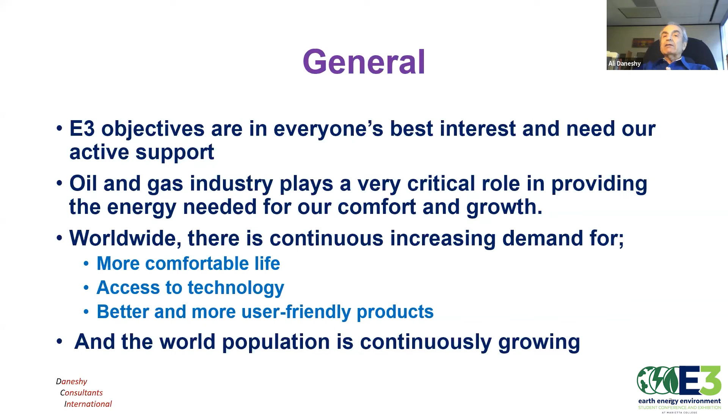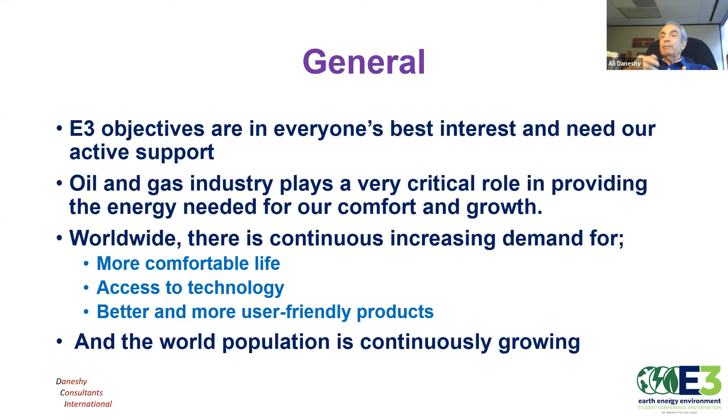The oil and gas industry plays a very critical role in providing the energy needed for our comfort and growth. Worldwide, there is a continuously increasing demand by all the people in this world for a more comfortable life. We like to have access to technology, and we want better and more user-friendly products. Also keep in mind that in addition to these increasing demands for a better life, the world population is also increasing, which means the volume of demand is gradually increasing.

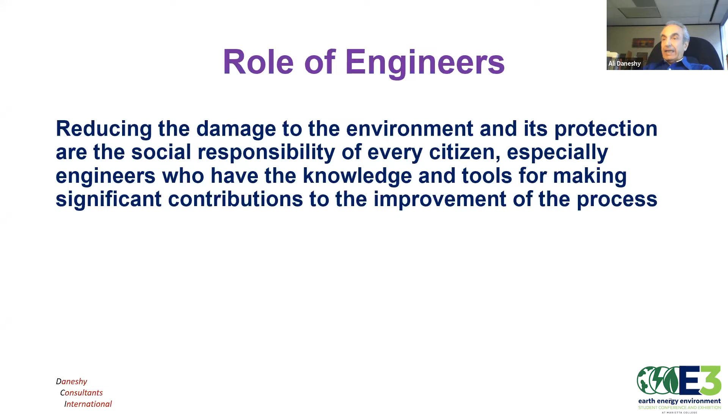Now, let's look at the role of engineers. Reducing the damage to the environment and its protection are the social responsibility of every citizen, especially engineers, because we have the knowledge and tools for making significant contributions to the improvement and protection of life and the environment. So as engineers, we have an added responsibility to be protective of the environment and contribute to its improvement.

So let's look at the role of oil and gas for world energy supply. Worldwide, our daily consumption of oil is around 100 million barrels per day. Some of the main applications of oil and gas, you all know this, but it's good to review quickly. Transportation, we all drive cars and they run on gasoline. Heating, electricity generation, farming applications, road construction, development of chemicals, plastics, synthetic materials. We use oil and gas, hydrocarbon materials, for all of these different purposes.

Now, together with the positive benefits, we also have some negative side effects. Consumption of oil and gas has these negative side effects: air pollution, you all know about that. Water pollution, climate change, everybody's talking about climate change and heating, thermal pollution, which is again heating of the environment and everything getting warmer, and solid waste generated as a result of our oil and gas production operations.

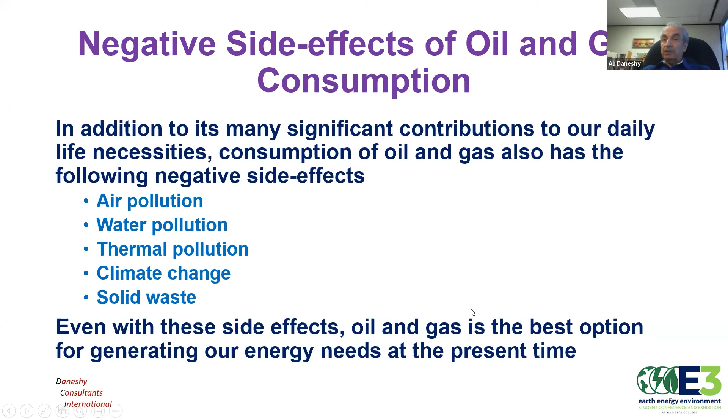So what is our way forward? Given our strong need for consumption of oil and gas, what is our best strategy to minimize the negative side effects of oil and gas production without making onerous changes in our daily lives? The answer to that is technology. Using technology, we need to focus on development of more efficient tools and techniques for production and consumption of oil and gas. Essentially, our savior for the future is going to be technology, its development and its application.

More efficient oil and gas production will contribute substantially to improvement of the environment. The oil and gas industry must continuously strive to improve the efficiency of its production techniques and the processes that we use for its production. Some of the very effective recent technologies for increasing the efficiency of oil and gas production are the ones that you all are familiar with, but I'll just go over them very quickly.

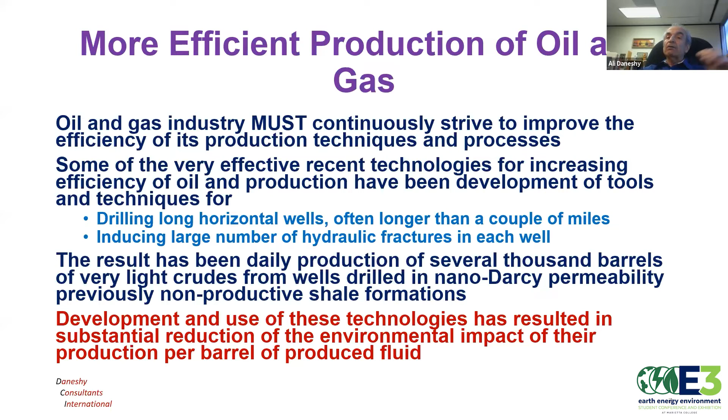Drilling long horizontal wells, often more than a couple of miles long, inducing a large number of hydraulic fractures in each well, as I will describe to you in just a minute. The result has been daily production of several thousand barrels of very light crude from drilled wells in nano-Darcy permeability formations, which were previously non-productive. These are in shale formations that were previously non-productive. Development and use of these technologies has resulted in substantial reduction of the environmental impact of their production per barrel of produced fluid. Let's get into this a little bit more.

US daily oil production is around 7.4 million barrels. A vertical well drilled and fractured in these formations would have produced just a few tens of barrels of oil each day. And many of these vertical wells needed to be drilled to the depth of 10,000 feet. Let's consider, just as engineers, a very quick calculation. If each well is producing something like 30 barrels of oil per day, and we want to produce 7.4 million barrels per day, how many wells do we need to drill? Just think about it. Divide 7.4 million by 20 or 30 and see how many you end up with.

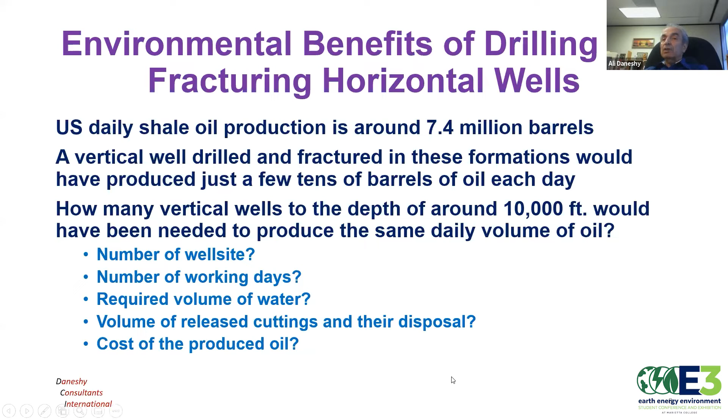Number of well sites, number of working days to drill all these wells, required volume of water for drilling all these wells, volume of released cuttings and how we're going to dispose of them. Again, something to be thinking about. And the cost of the produced oil, if we have to drill so many wells and treat them to be able to produce the required volume of oil and gas in order for us to live our life the way we are. More efficient production of oil and gas has been contributing to improvement of the process.

So what are we doing? First of all, we drill horizontal wells, and these horizontal wells extend sometimes more than 2 miles. And in each of these horizontal wells, we create several hundred fractures. That in itself has resulted in production of, let's say, 1,500 to 2,000 barrels of oil per day from a single well, as opposed to 20, 30 barrels of oil from each well, which would require a much larger number of wells.

Now, in addition to that, the other technology improvements that we have introduced are pad drilling, which means we drill multiple wells at the same time, which brings efficiency of the operations, well site, equipment, and everything else. Pad fracturing: fracture multiple wells consecutively, so that when the equipment moves on location, instead of fracturing one well, moving off and coming back again, we fracture multiple wells one after the other. The next step in this process has been simul-fracturing, which means fracturing two wells at the same time with the same equipment. Each one of these has substantially reduced the environmental impact of our drilling and fracturing operations. Every one of these technology advances has resulted in a significant reduction in the environmental impact of oil and gas production.

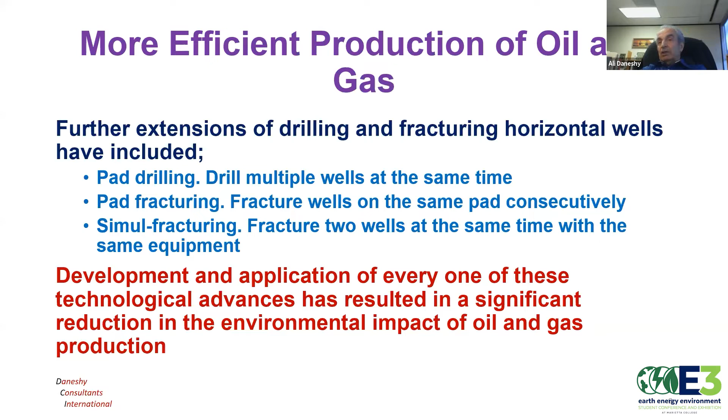So, the next changes in drilling and fracturing operations that we can make: how long a horizontal well do we really need? At the present time, the length is around 2 miles. Is this the optimum length? What is the optimum spacing between these wells? Right now, these wells are somewhere in the order of 800 to 1,000 to 1,200 feet apart. Is this an optimal spacing? How many fractures do we need in these horizontal wells to get the best production? And by best production, I mean in terms of the volume of production as well as the environmental impact.

How big a fracture do we need to create? At the present time, in some of these wells, we inject somewhere in the order of a few million barrels of water. We pump somewhere around 10 to 20 million pounds of sand in each one of these wells. Is the volume of materials sufficient? Is this optimum for getting the production that we need, getting the desired number of fractures and so on? These are all technical questions that need to be addressed as we move forward in order to improve the efficiency of our operations for the production of oil and gas.

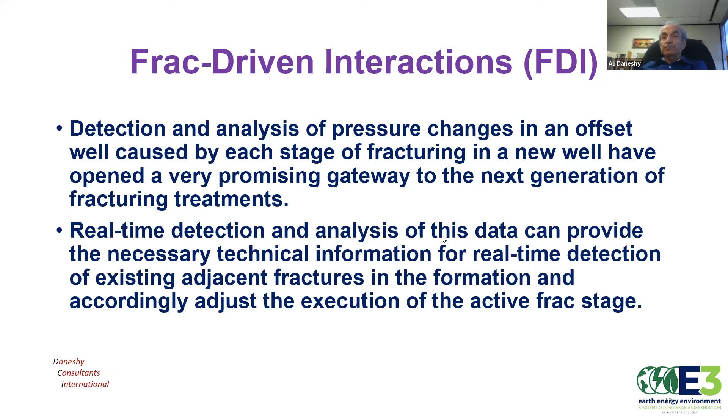So my last words are these. There are three kinds of people: the few who make things happen, the many who watch things happen, and those who have no idea what has happened. Just when you think something can't be done, somebody goes ahead and does it. As engineers, it is our responsibility to improve and enhance the efficiency of our operations. And if we don't do it, nobody else is going to do it. It is our responsibility to do that. And so with that, let's get to work.

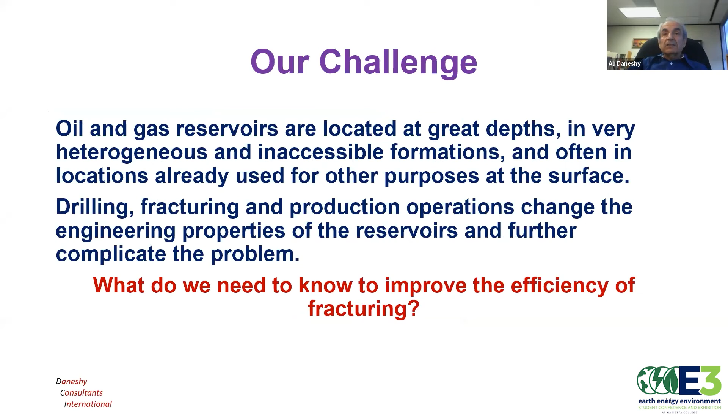Actually, that's one of the items that I was discussing. Let me go up to that. The challenges that we're faced with are related to increasing the efficiency, which includes how long a well we need to have. We are drilling them 2 miles right now because that's the ongoing practice, and people have learned how to do that. But how long do these wells need to be to get more efficient operations? What's the spacing between these wells? Right now it's somewhere around 1,000 feet, 800 to 1,300 feet. Is that an optimum spacing?

Number and location of fractures in each well. Right now we are putting these fractures every 20, 30 feet apart. Is this an optimum number? Size of each fracture. And the materials: in some of these horizontal wells, we are pumping 10, 20 million gallons of water. Is that an efficient use of the water? And so that's the challenge that we are faced with. Can we improve on the systems as they exist and as we are practicing?

And my response to that, I'll give you my very frank response. I think we are a little bit overdoing it. We should be able to produce the same volume of oil and gas with a smaller footprint in terms of materials, equipment, number of wells, number of fractures, and so on. And that deserves our attention, and it should be the focus of the ongoing improvements that we are trying to make. Your point is very correct, yes.

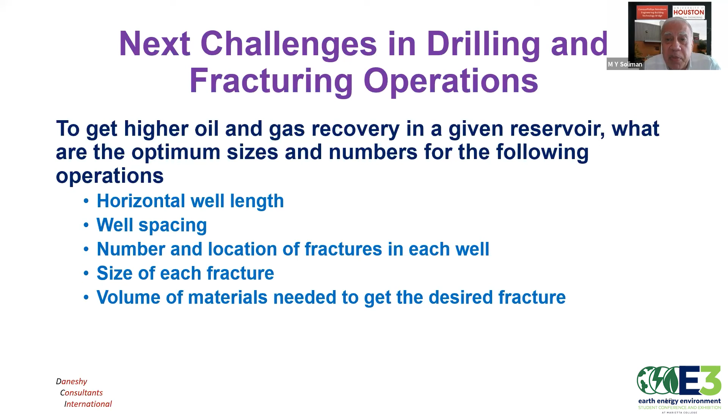Whether this is going to be an economical process, I have some doubt. I have not done the calculations, but they need to be done to see how much energy it takes to do it, and then how much energy it will take to store the CO2, because you can't release it to the atmosphere.

And let's keep one other thing in mind: the oil and gas that we use is not only used for energy, but for a number of other things. The raw material for plastics is oil and gas, synthetic materials, chemicals that we use. So the need for oil and gas is going to continue for a long time to come. What we are looking at is not eliminating the need, but keeping it to a minimum. Yeah, as you mentioned, for a long time we will need to produce oil for energy as well as for other byproducts.

Right. This is one of the things that sometimes makes me a little bit unhappy, is this focus on fracking and the talk about banning fracking and all of that without fully understanding the consequences of that. I think what we need to look at is efficient production of oil and gas, and not focus on any particular technology as being unfriendly or harmful or anything like that.